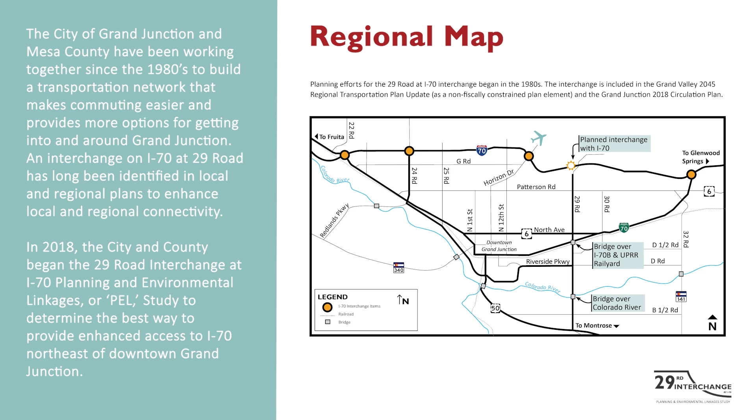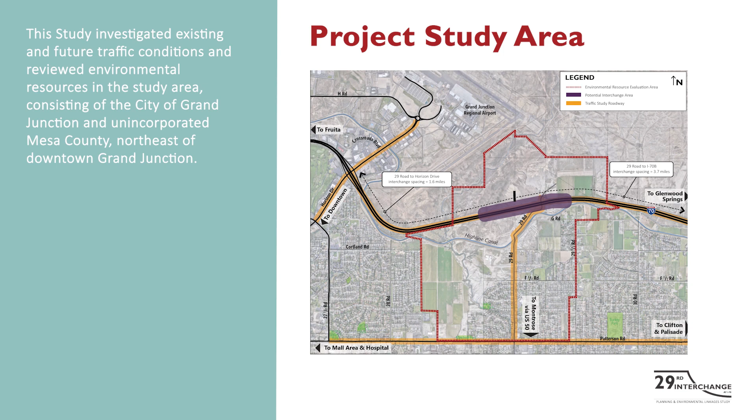This study investigated existing and future traffic conditions and reviewed environmental resources in the study area, consisting of the City of Grand Junction and unincorporated Mesa County, northeast of downtown Grand Junction.

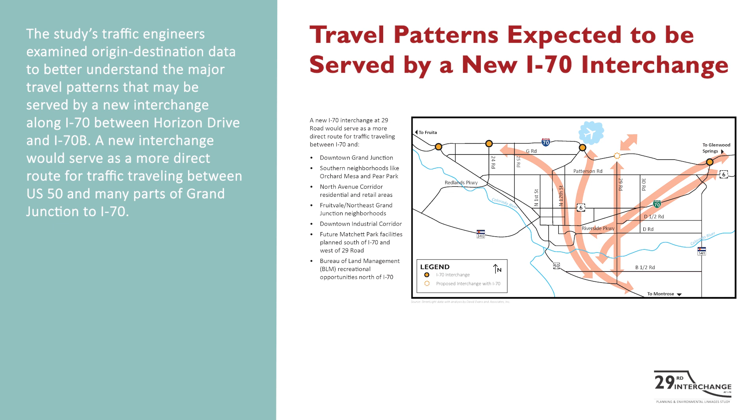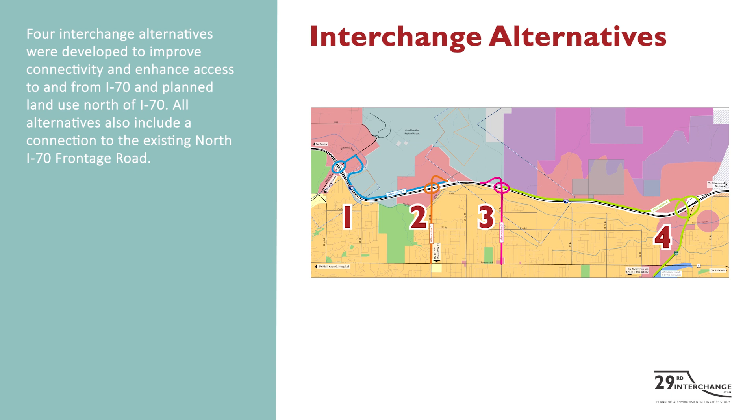Four interchange alternatives were developed to improve connectivity and enhance access to and from I-70 and planned land use north of I-70. All alternatives also include a connection to the existing North I-70 frontage road. Alternative 1 includes improvements at the Horizon Drive interchange to allow for more capacity and better traffic flow, and a new roadway around the airport property to connect to the North I-70 frontage road at 29 Road.

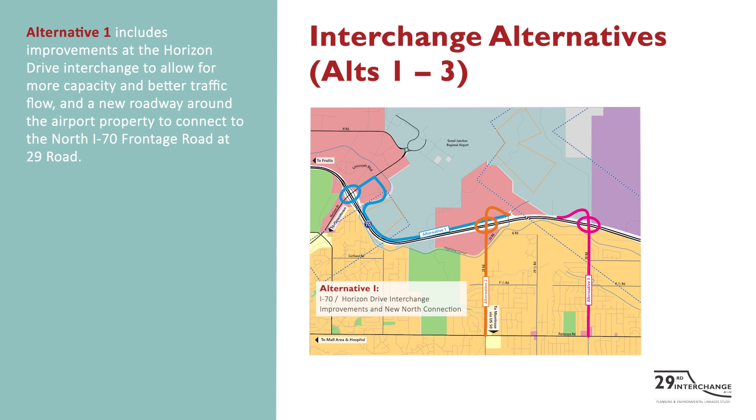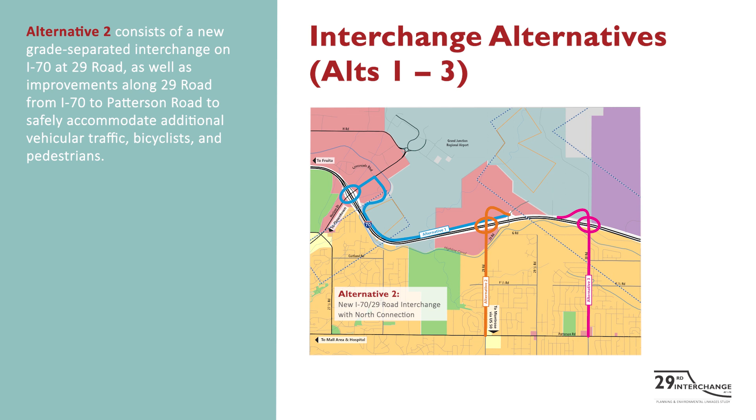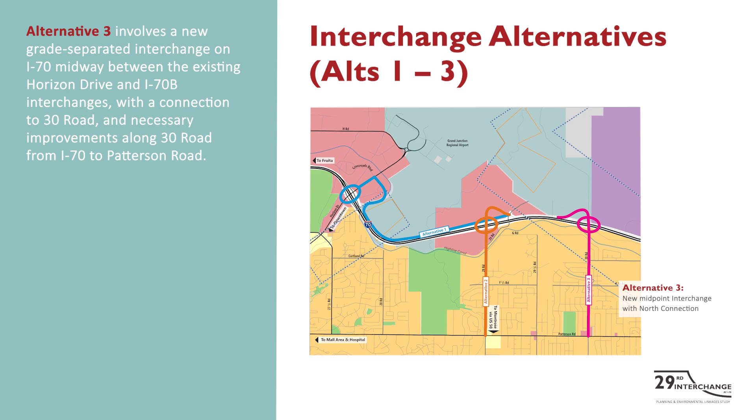Alternative 2 consists of a new grade-separated interchange on I-70 at 29 Road, as well as improvements along 29 Road from I-70 to Patterson Road to safely accommodate additional vehicular traffic, bicyclists, and pedestrians. Alternative 3 involves a new grade-separated interchange on I-70, midway between the existing Horizon Drive and I-70B interchanges, with a connection to 30 Road, and necessary improvements along 30 Road from I-70 to Patterson Road.

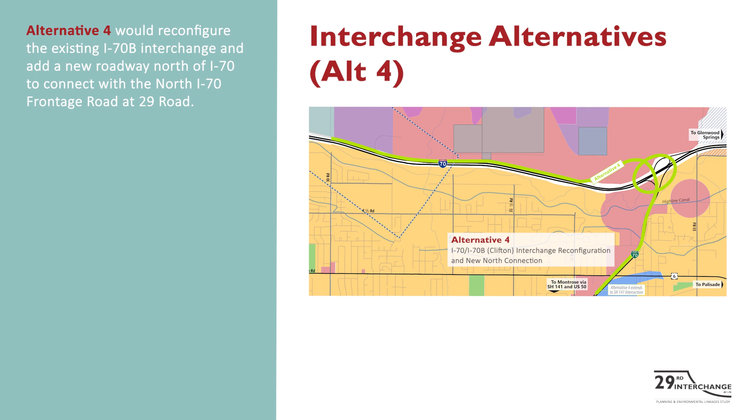Alternative 4 would reconfigure the existing I-70B interchange and add a new roadway north of I-70 to connect with the North I-70 frontage road at 29 Road. The interchange alternatives and a no-action, do-nothing alternative were then evaluated against screening criteria. The purpose of this screening was to identify alternatives that meet the purpose and need and can then move forward for consideration in future National Environmental Policy Act, or NEPA, processes.

Two interchange alternatives met the project purpose and need and could therefore move forward into a future NEPA study: Alternative 2, the new I-70 29 Road Interchange, and Alternative 3, the new Midpoint Interchange. The no-action alternative does not meet the purpose and need. However, it is carried forward for baseline comparison with any interchange alternatives. The other alternatives did not meet the purpose and need and were eliminated from further consideration for this project.

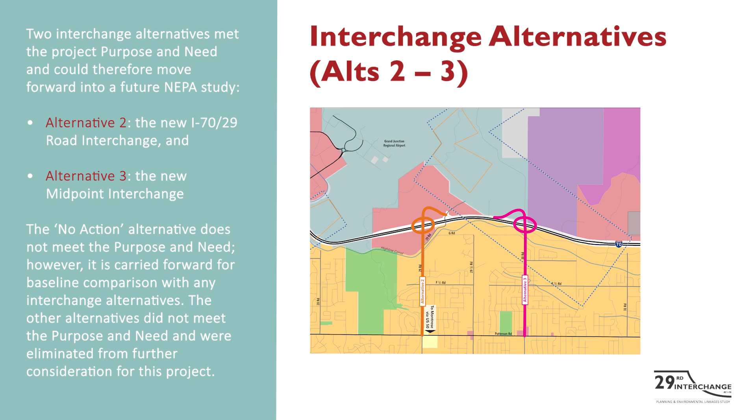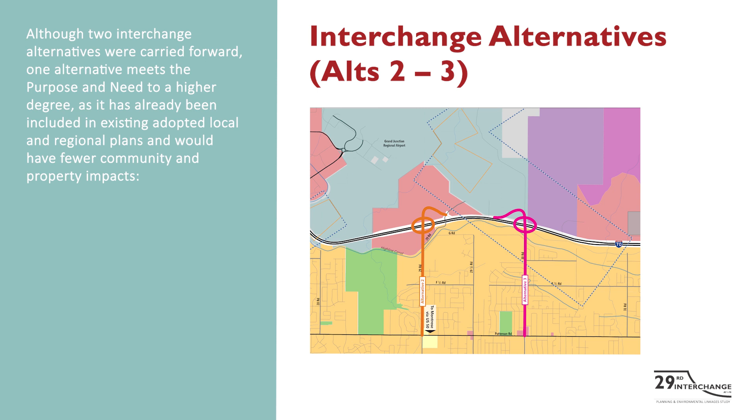Although two interchange alternatives were carried forward, one alternative meets the purpose and need to a higher degree, as it has already been included in existing adopted local and regional plans and would have fewer community and property impacts. Alternative 2, the new I-70 29 Road Interchange with North Connection, is the only interchange alternative recommended by this study.

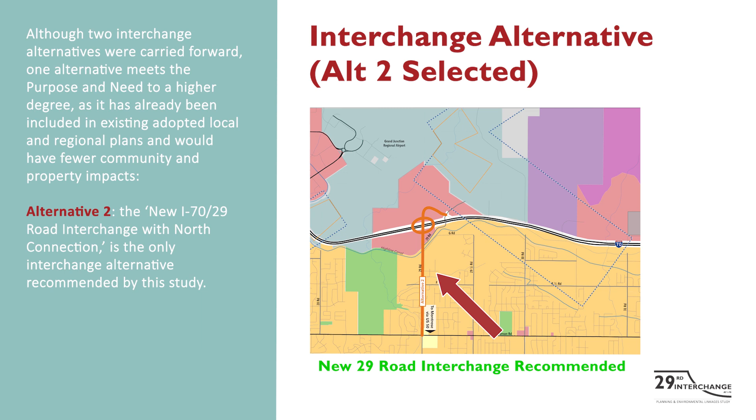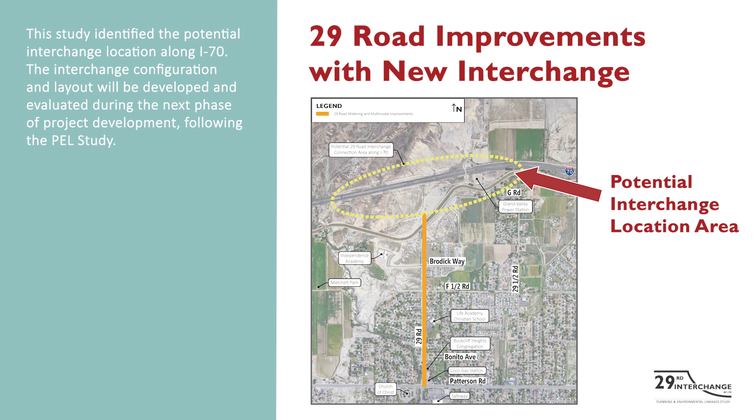This study identified the potential interchange location along I-70. The interchange configuration and layout will be developed and evaluated during the next phase of project development following the PEL study. The recommended interchange alternative includes improvements along 29 Road between I-70 and Patterson Road to better accommodate future traffic volumes and multimodal safety and mobility.

The city's standard cross-section of 110 feet is preferred in sections with wider available right-of-way, such as the northern portion of the corridor. A narrowed cross-section of 90 feet with reduced median and sidewalk buffer width would be considered where needed to minimize property impacts. Details of this roadway design will be determined with community input during future project design phases. Emphasis will be placed on avoiding and minimizing impacts to adjacent properties.

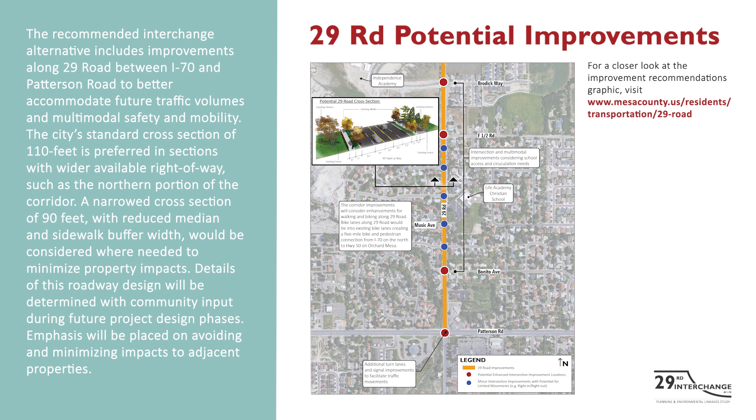Several intersections along 29 Road are expected to be improved with enhancements such as a traffic signal or roundabout, including Brodick Way, F and a Half Road, and Bonito Avenue. Other intersections providing neighborhood access along 29 Road would have minor intersection improvements with the potential for limiting turn movements to improve safety, such as conversion to serve right-in, right-out movements only. The intersection and multimodal improvements would consider the area's school access and circulation needs. The Patterson Road intersection would also be improved with additional turn lanes and signal improvements to facilitate traffic movements.

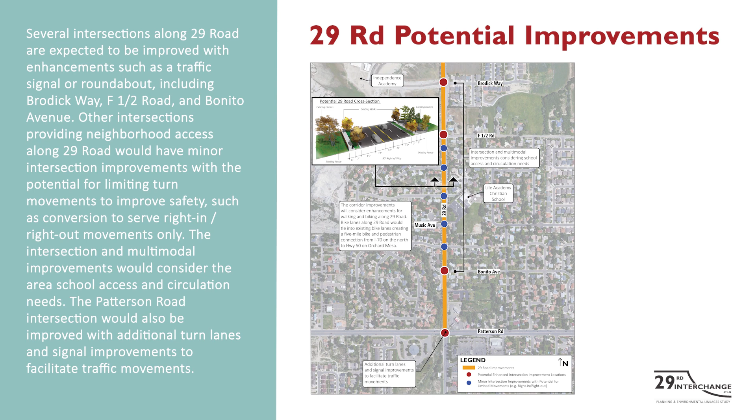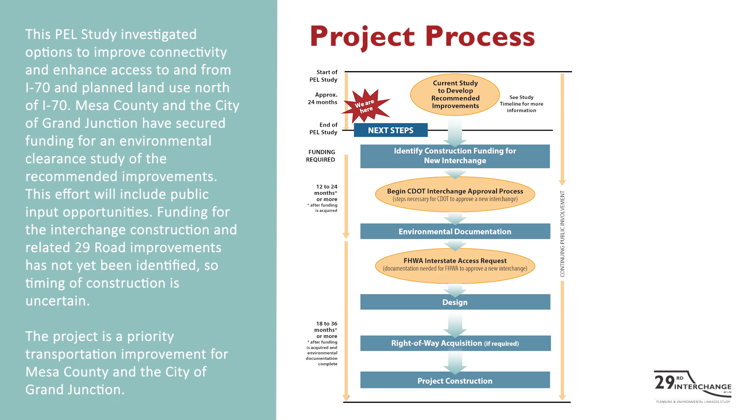Once study recommendations are finalized, they will be documented in a future PEL study report, which will be made available on the project webpage. This PEL study investigated options to improve connectivity and enhance access to and from I-70 and planned land use north of I-70. Mesa County and the City of Grand Junction have secured funding for an environmental clearance study of the recommended improvements. This effort will include public input opportunities. Funding for the interchange construction and related 29 Road improvements has not yet been identified, so timing of construction is uncertain. The project is a priority transportation improvement for Mesa County and the City of Grand Junction.